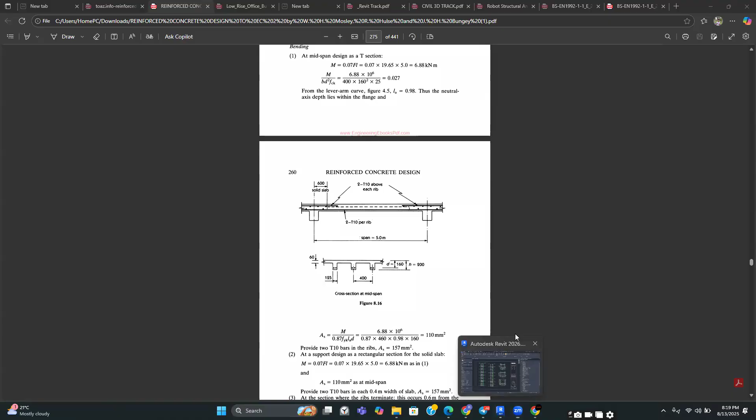So with that, we are going to proceed to the software, and we are going to start with modeling rebars for the staircase. I'm going to share my screen, and once you can see my screen, please type a one so that I can know we are together. Let me know that we are together. Okay super, thank you so much.

So I'm going to go to modeling the rebar for the staircase. At this point, we have modeled rebars for most of the elements, and all that is remaining is the staircase and the slab. So for today, we're going to start with the staircase. To model rebar for the staircase, we need to work in sections, just as we did earlier, just as we have done for all the other elements. For you to model any reinforcement in Revit, I hope by now you can at least appreciate that you have to do it in a section. I will delete these sections that had already been created so that we can create new ones from scratch.

To model rebar for the staircase, the first thing you have to do is go to one of the structural plans. You can open any of them. I'm going to open the first floor. And then once I open the first floor, I will have to create a section view.

And then this is a tricky bit for stairs. You have to work with two sections. The first section will allow you to model rebar for the first run of the staircase, and the second one will allow you to model rebar for the other run, including the landing. But don't worry about that, you are going to see it in action.

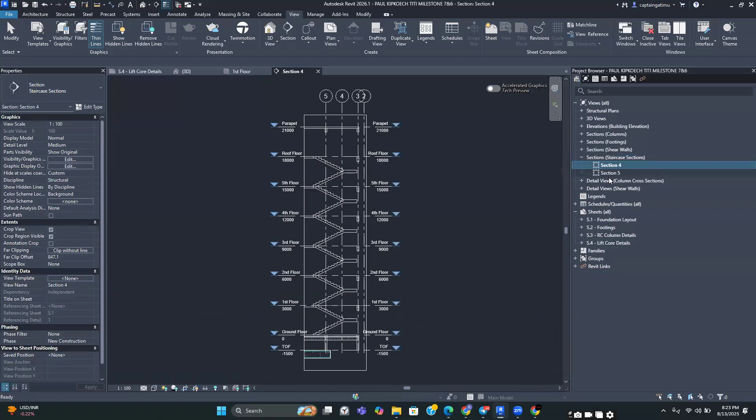After you do that, you can now go to your section views. Let's look for the section views - here they are. You can open both of them, so open both and we'll proceed.

After you have opened these section views, you can change the scale. You can work with 1:50 or 1:75, depending on how much detail you need in your papers. If you want to fit more details into your paper space, then you can work with a smaller scale, the 1:75. But if you're going to have a dedicated page for the staircase, you can use the 1:50 because it's going to allow you to have a bigger representation for your staircase details.

After this, you're going to follow the same procedure we have done over and over again. We are going to clean this up a bit, selecting the grids that we do not need in the views and hiding them. We're going to hide all the elements that we do not need, and we can also extend this forward just a little. Then after that, we can hide this in view, ensuring it's very clean, and then you are good to go.

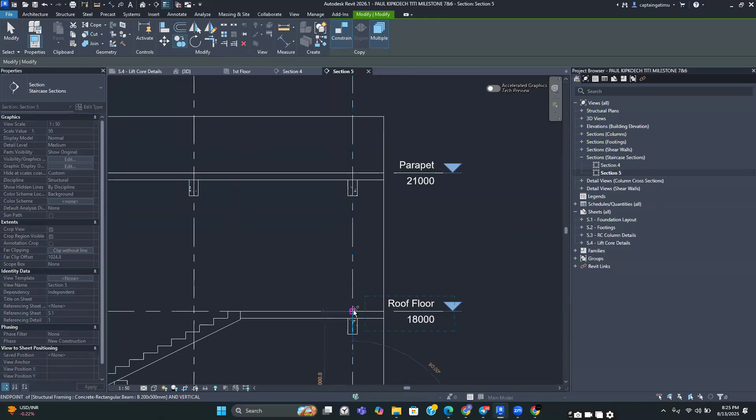Go to the annotate tab, use the components, and now place the breakline so that you can have your breakline there. Then select the breakline and copy it to the other floors - copy it upwards, choose a base point that you can easily track or find in the other floors, and place it. Okay, and then you have your breakline there.

Let's copy it as well from this floor to this floor as well. Then from here, we can extend it so that it goes below the ground floor. I'll select it, type CS to create similar, and create another one there just to break my columns. Then I can bring this one up a little bit and fit it much better. After I have that, I can just copy this to the other columns - that's what you're going to do. After you've done that, you're going to have a very, very clean detail.

So we are going to start with one thing. The first thing that you're going to do is to create the staircase thickener, and this thickener is what is going to be the foundation for our stairs.

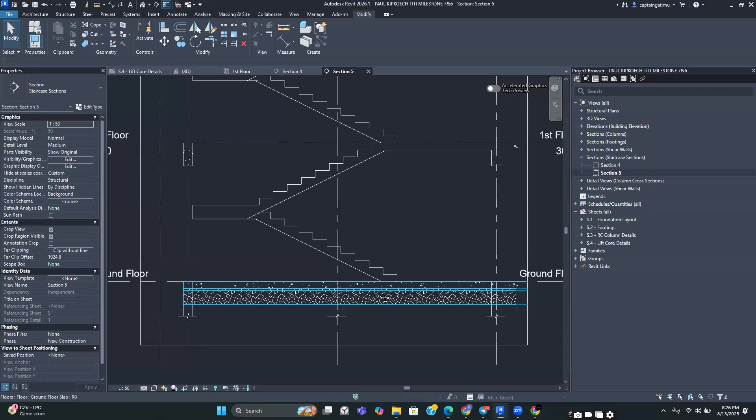I remember in one of the sessions, someone asked how we model or show the staircase foundation in the ground floor. Okay, so this is how you do it. We create a staircase thickener in Revit, and it's relatively easy. You go to the View tab and use the cut profile to create the staircase thickener, or what you'd call the staircase foundation. That is the foundation that is going to be restraining or supporting this slab from this point here. Before I create it, let me reiterate the process we're going to follow to model rebar for the staircase. First, go to a structural plan.

You're going to create two section views, and ensure these section views show you both runs of the staircase. This one should be placed along this run, and it should show you this run as well. Then this one, you should place along this run, and you should extend the view depth so that you can view this other run as well.

If I was to select one of these views and reduce the view depth so it does not go into the other run, this is how the detail would look like. In the section view, you will not be able to see the other run. But as you extend it, remember, the deeper or the more objects in your view depth, the more you're going to see in your section. After you extend it, you're now able to see it in the other section as well. So with that, I think we can proceed to model the thickener.

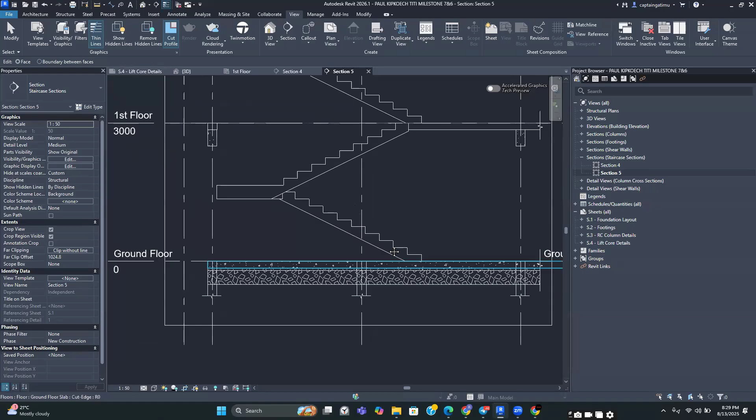If you click on cut profile, come to your section, and try to select this lower run of the staircase, you're going to find that I cannot select it in this section 5. But if I go to section 4, I should be able to select it. I hope you saw that.

If you go to section 5, I'm only allowed to interact with the top part of this run of this staircase. So if I try to create the thickener using this view, I will not be able to. If I click on this run of the staircase, the software will not allow me to select it. If you find yourself in a similar situation, just go to the other run and clean this run up, then clean up this section. If you try to do something in one section and the software does not let you, just click escape, get out of that command, and go to the other section.

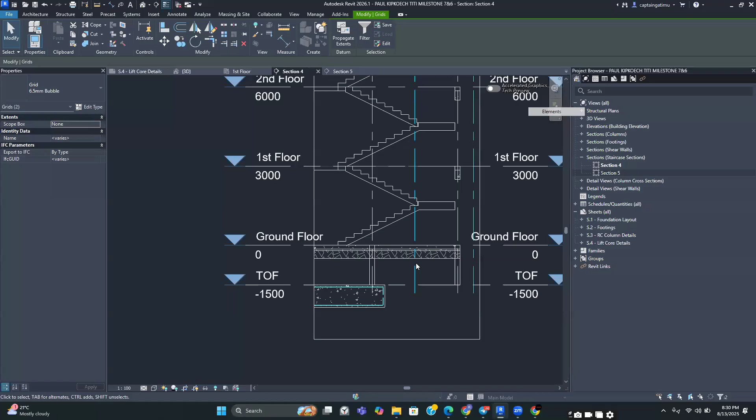This is the section that you're going to be creating the cut profile in. If you go to the cut profile and select the lower run of the staircase, and it is highlighted in such a manner, this is the section we are interested in, and the one we have to clean up. I'll clean my sections again, hiding the unnecessary items in this section, and then extend it a little bit. Then I'll go to annotate components and redo basically everything that we had done in the other view. Let me start with these columns here.

Let me have something of that sort and bring it up just a little bit. I'll select this and copy it from that grid to the other columns as well. Then with that, I can now bring this one up to that section.

Then I'll change the scale to 1:50, and select one of these break lines, type CS to select create similar, and place another section or break line at that point, then extend it to that point. Then I'll select this, create similar, type CS, and place another one at that junction.

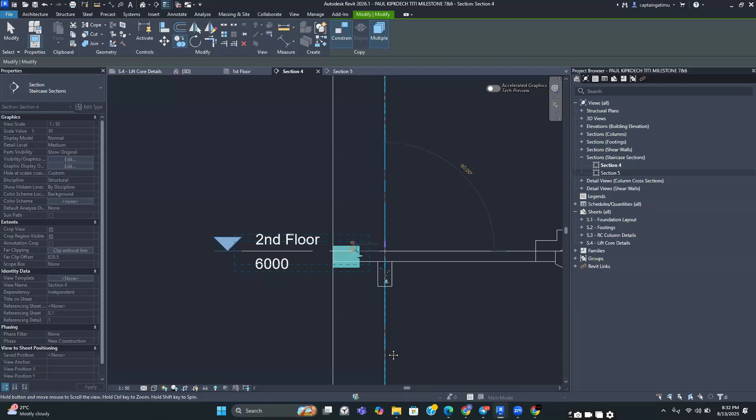Then I can minimize this one so that it fits better into this slab, because this slab is a bit thinner, or has a lesser depth than the ground floor. So after that, I'll select this and copy it to the other floors.

So that's how we do it. After you do that, please ensure you hide everything that you do not need, like those section views — they are unnecessary at this point. So select them and hide them.

After you have such a clean detail, we want to start creating the staircase foundation, or what is referred to as a staircase thickener. So we go to structure, or view, and create that cut profile. Basically, how the staircase foundation or thickener happens is — remember that this slab is only 150 millimeters deep.

And then we have the dust blinding, and the compacted murram. These materials are not strong enough to provide the staircase with any kind of restraint or support. So the thickener shows the guys on site that at this point, this foundation, or staircase thickener, will not be formed of these materials — the compacted murram as well as the dust blinding. It's going to be concreted with the ground floor slab. So that's the purpose of having that thickener.

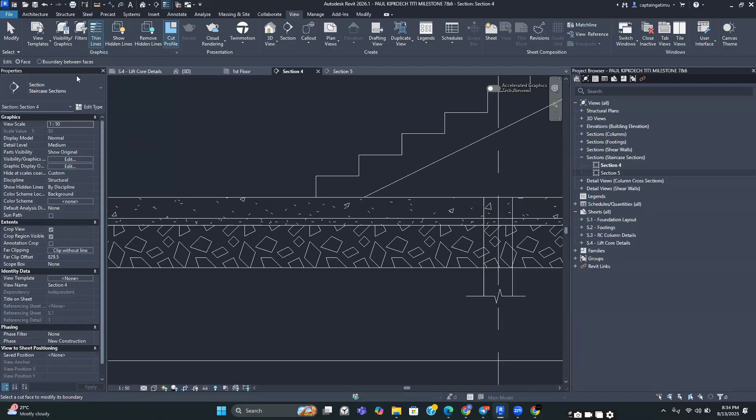For this one, we use by face when there is no other material between those two faces. For example, this one you're going to use face because there's no other material here. For the slab layers, we use boundary between faces because there are multiple faces — we have this face, then the layer for the dust blinding, and then the face for the murram.

So as we said, we start with cut profile, ensure that in edit you have selected face, then select the lower run of your staircase. After that, draw a line and extend your cursor downwards at the end of the second tread. Extend it downwards, and once you get to the boundary of this lower edge of the staircase, left click, drag it downwards, and drag it to this other edge where this lower surface of the staircase meets the ground floor.

At this point, you have to note that you should not close this boundary — you have to leave one of the edges open. I repeat, you should not close this boundary; you need to leave one of the faces open. So this is the face that you are going to be leaving open.

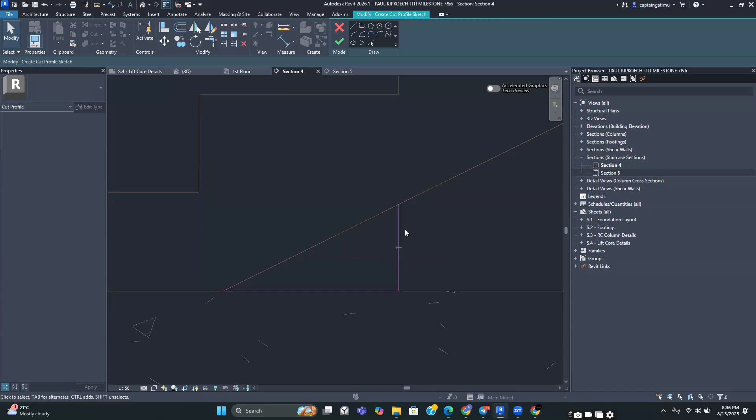This arrow shows you the material that is going to be used to create the thickener. Since we want the staircase material, the concrete, to be used to create the thickener, this arrow should point inwards. If your arrow points inwards, just click finish. But if it points outward, click on it and it will face the other way, then click finish. Now you have the first part of your thickener, so we'll proceed to create the others.

To create the rest of the thickener, we go to view, and use the cut profile again. Left click on cut profile, and for now we are going to use boundary between faces.

So I will left click on boundary between faces, and then I'm going to be prompted to select the face I want. We are now interested in creating the thickener downwards here, between the layers, between the slab layers. And that's why we use the cut profile boundary between faces.

So you go to cut profile, click on boundary between faces, zoom in and select this boundary between the concrete and the dust blinding. You select it, and then the contextual ribbon is going to change to allow you to model. Before you model, we're just going to draw a few lines so that they can guide us.

So I'm going to use the pick lines, and then enter an offset of 150 mm. I'll offset this by 150 on this edge, and this by 150. Then I'll press escape, select this edge that I just drew, extend it downwards, select this one, and extend it downwards. After that, now I can model my cut profile.

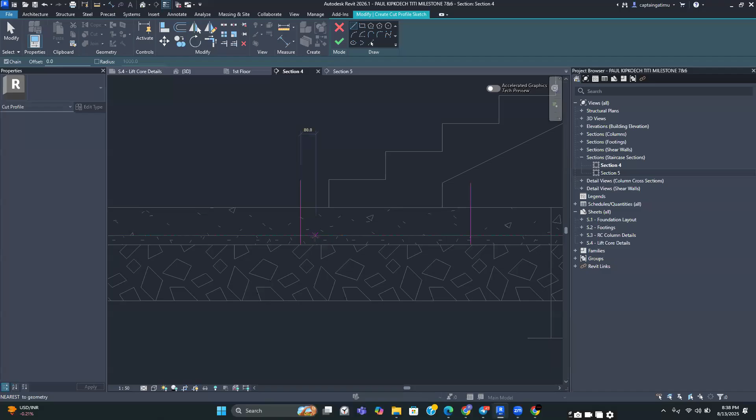So I'll select line, come to the intersection between this line and this boundary, and draw an inclined line at 45 degrees. Then I'll do the same on this other end - I'll draw a line, and at this point it will be 135 degrees.

And then I will extend it to meet this line here. After that, I'll delete these other lines - they are not necessary. Remember one face has to be open, so this is the face you're going to leave open, and you click on finish. You can see now that some profile has been made here.

You can see now the concrete is going into this level at this point, and then at this point it goes back into the layers as they were. All right, so we have that there. So the next one is to create the boundary between this material here and this material here.

So to do that, we go to cut profile, and then select boundary between faces. At this point, you're going to select this boundary, and after you select this boundary, it's going to go down by a depth of 150 mm. So you click on pick lines, enter 150 in the offset, and press enter.

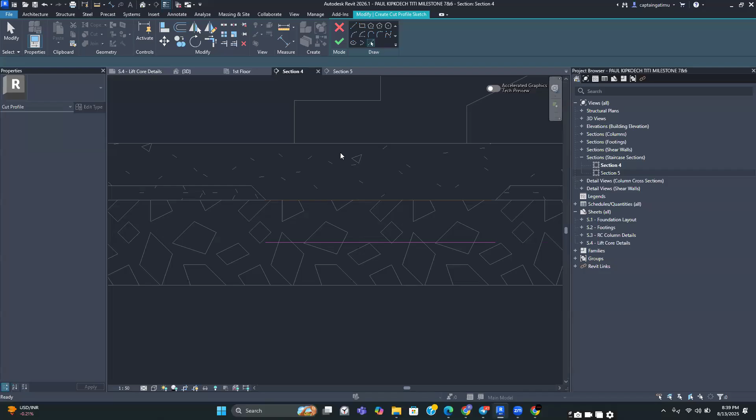And then after that, you just create your offset going downwards, and use the line tool to guide this one to go downwards. Extend it by 45 degrees and do the same on this other edge, just 135 degrees. After they join, use the trim extend to corner to trim them. Then you can click on finish and you're good to go.

And then by doing that, you've now created a detail for your staircase thickener.

So after you have done that, now you can start modeling your rebars. It's going to follow the same procedure that we did for the other elements. The first thing that you are always going to do is to model the concrete cover. So you're going to start with the concrete cover.

You're going to go to structure, and then left click on cover and select our staircase. After you select your staircase, we are going to create a new cover here - a new cover setting for the slabs and staircase. So I'm going to click on add and add slabs and stairs. In the setting, I'm going to use a setting of 25 and then click OK.

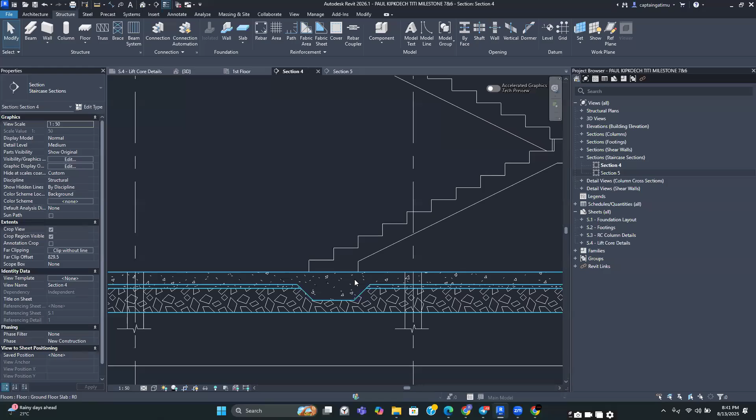So now to model the other bars, to model the staircase bars, we are going to start with the starter bars. And the starter bars are the bars that go into the thickener, and they are going to be restraining our staircase from this point here.

After that, we are going to model the bottom bars and the top bars as well for the staircase. And remember, as we said, Revit only allows us to interact with one run at a time. So in this section, we can only interact with the lower run, and in the second section, we can only interact with the upper run.

Okay, so you're going to go to section, left click on rebar, and then we are going to draw them by sketch. So click on sketch, and then as usual, you're going to select your staircase. To use the sketch option, you go to rebar, left click on sketch, and select your staircase. After that, you can now model your rebar.

Before we model our rebar, let's go to the properties. Ensure that you are using a diameter of T12 for the starter bars. And then for the partition, let's create a new one. Let's call it stairs. And then in the rebar set, we cannot change that at this point.

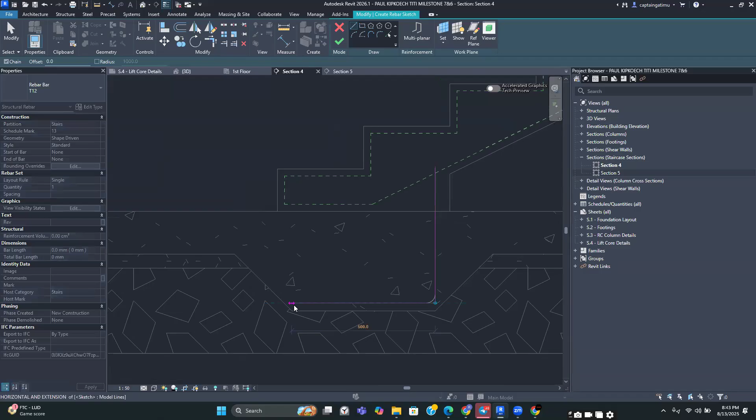So we are going to draw it first. We are going to draw the layout of our rebar, extend it to that point there. And then for this point, extend it to this point here and bring it upwards. And then at this point, this is going to be used to restrain our slab, our staircase, in that order. So you extend it to that point there and use the trim extend to corner to join them. If this happens, just redo that. And you have the outline for your starter bars.

Then after you have that, click on finish and you have one starter bar. Then select the starter bar, go to its properties, change the layout rule from single to maximum spacing and have a spacing of 200 mm.

And then in the comments, now enter the new comment. We've not used this comment before, so it's going to be starter bars. And then you can click on apply and you are good to go. So that is the first step.

Then the second step will now be to model the bottom one bars. We are going to start with modeling the bottom one bars. But before I model the bottom one bars, I'd like to bring something to your attention.

So the bottom bar of the staircase usually goes into the top part of the landing as well as into the slab. So the bar running along the bottom part of the staircase is going to go into the top part of the slab. The reason for that is if it goes to the top, it has a larger concrete depth to anchor it or provide the restraint it needs. So you can imagine if this bottom bar, the main bar along the longitudinal direction of this staircase, goes into the bottom part of the landing...

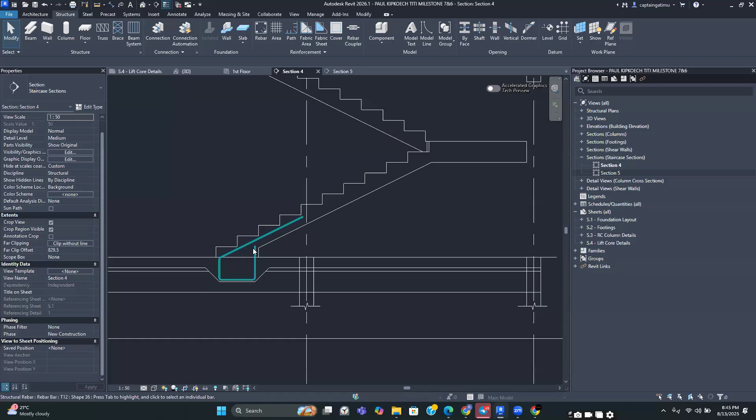So we are going to start with the bottom bar. We are going to select rebar, and then we are going to go to sketch. And then after you go to sketch, we are going to select the staircase.

At this point, I hope you can see what I was saying earlier. Revit allows you to only interact with the lower run. So in this run, you can see only the lower run of the staircase has been highlighted through the entire structure. Okay, I hope you can note that.

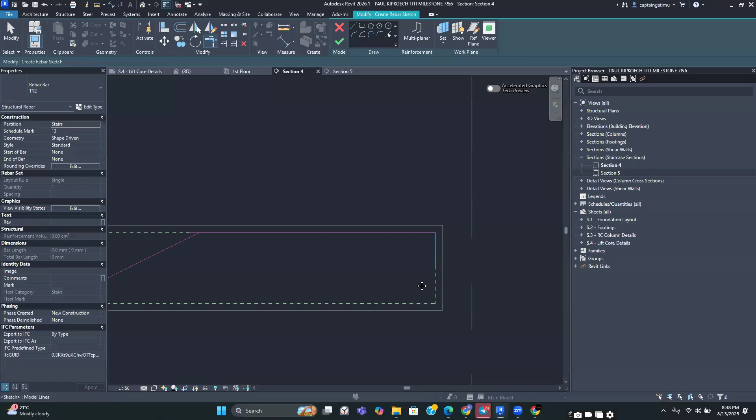Okay, so sometimes this happens. Just select this line and join this, then use trim extend to corner in the different direction, and then click on finish.

After you have that, you can select this rebar, and if you want to change the bar diameter, you can do it from here. After you've selected the rebar, ensure the partition is correct.

Stairs in the layout rule, click on this drop down and change it to maximum spacing. For the spacing, let's have 200 mm. In the comments, we are going to have it as bottom 1, and click on apply. Okay, so we have that.

Then the second thing we need to do now is model the top bar for this portion. To do that, we go to rebar, use the sketch, click on sketch, and select your stairs.

If you are not sure about the length of the bar you should draw as your top bar, this length should be at least a third of your staircase span. So if you're not sure, measure to know the length of this run, and have your top bar running along that direction. In the landing, it should go the same distance.

So if you find that in this run you need about 1.2 meters, go in this way. For example, if you need about 1.2 meters or 1200 mm going that way, you have to ensure that in this run as well it's at least the same.

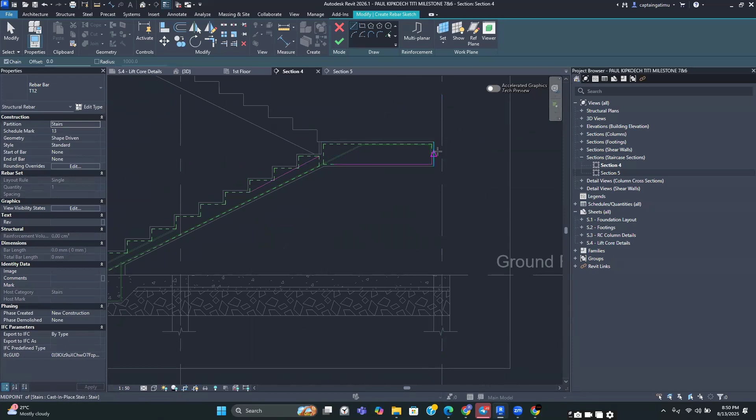But for now, we just extend it to the end of this landing. After you have that, click on trim extend to corner and join them. Okay, so that did not go how I wanted.

I'll just draw another line here, and extend this here. Yeah, and then I'll join them there. That's happening a lot today. Okay, so I have that, and I'll click on finish.

With that, I can select this bar, go to the properties, ensure the partition is correct. In the layout rule, ensure it's maximum spacing, let's have a spacing of 200 mm, and in the comments let's use top one for this one. Then we can click on OK.

Then the next bit is to model the secondary bars, the bottom twos and the top twos. To model those bars, we go to Rebar, use expand to host, and we use shape 00 or 01.

For any bars that we said would be viewed as dots, or running perpendicular to the cover, we select perpendicular to cover, change the layout rule to maximum spacing, and have a spacing of 200 mm. Then partition them correctly as the stairs, and in the comments do the necessary.

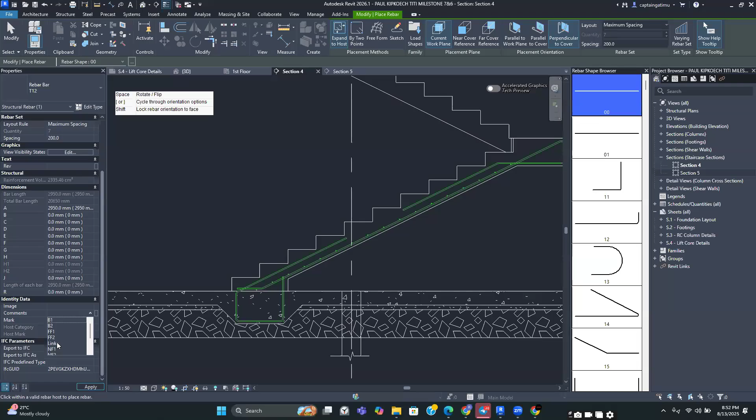In the layout rule, set maximum spacing, and that's the spacing we need. Bring them close near your bar and place them. For this one, we do not need them near this part where we do not have any top bar, so we're going to select it and drag it backwards.

We can have such a detail there, and those will be our top two bars for this particular section here. For this other section over here, we do the same.

We go to Rebar, select shape 00, and place them at this junction there, and we should be good to go. After you do that, select them and drag them so that they span along where they are actually needed. Then, with the bar still selected, change the comments to top two, and you are good to go. That's how you do it.

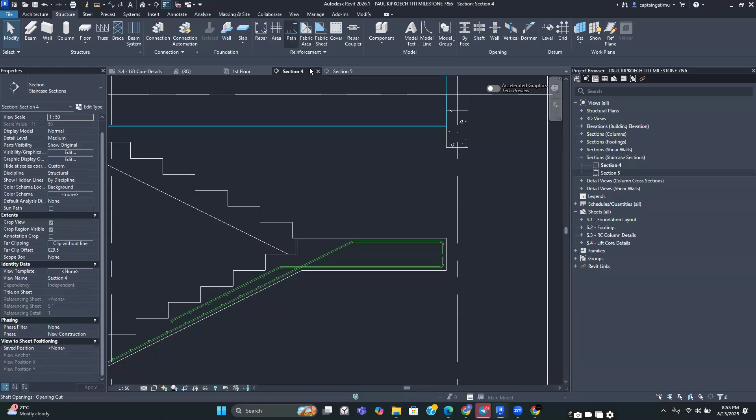The next thing would be to model the bars that are going to be in the landing. For that one, it's going to be easy. You just go to Rebar, click on sketch, and select your staircase.

At this point, we are going to have a bar here. This one can be straight, so we're going to select a bar here and bring it to that section there, and have it there as well. Then click on finish.

For that one, select it, go to the properties, ensure the partition is correct. In the layout rule, have maximum spacing and set it to 200. Then in the comments, let's have this as top one, and we'll be good to go.

I'll model the rest of the bars after I model the bars for the other run, so that it makes a bit more sense.

Now we want to model bars for this top run. It's going to follow the same procedure, but now it needs to go into this other section. If I try to select Rebar, sketch, and select my staircase, I will not be able to draw these bars in this run here. So to model bars in this run, you just go to the other section, select Rebar, select sketch, select your staircase, and then start modeling.

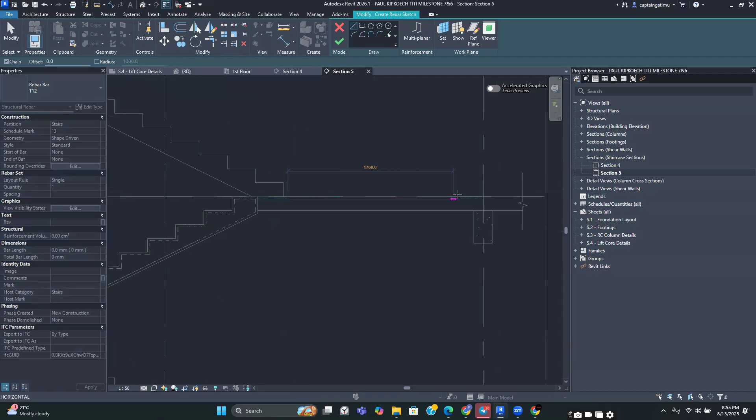For this one, we are going to start from here. Select this bar and model the bottom part of it, and it's going to go along the bottom part of this staircase. Remember, the bottom part of the bottom rebar has to go to the top of the slab, and in the slab, ensure it extends up to the support, then you can curtail it there.

After you have that, use trim extend to corner to join them, or make your work easier in joining them. Then just click on finish, and you should be good to go.

You can now select this bar, go to the properties tab, ensure that it has been partitioned correctly as stairs, and in the layout rule, have maximum spacing with 200 mm. Then in the comments, change the comments to bottom one and click on apply. Then you have your bottom one bar over there.

You're going to select rebar again, use sketch, and sketch the other rebar, so you're going to have a small top bar here. Select to draw just a small top bar there. This top bar will also extend into this lower run as well. You're going to join them in such a manner, and then click on finish.

After you have that, go to the properties tab, select it, change the partition to stairs, the layout rule to maximum spacing, and a spacing of 200 mm. Then in the comments, change the comments to top one for this, and then click outside, and you're good to go.

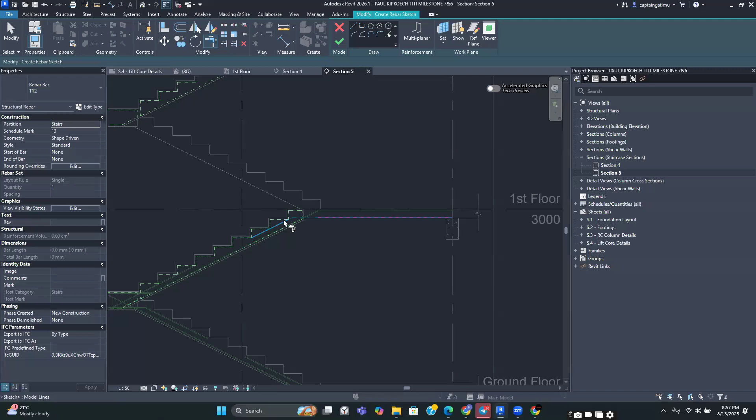After you have that, go to rebar and model the bottom bars, the bottom two bars of the secondary bars. Select shape 00 or 01, go into the properties tab, ensure the diameter is correct, the layout rule is correct, and then set the comments to bottom two, and model or place them there.

For the top two bars, do the same thing: rebar, shape 00, then properties tab, stairs, layout rule maximum spacing, and for the comments set top two. Then zoom in - sometimes it's a bit tricky, so you can just place them at a point and drag them backwards.

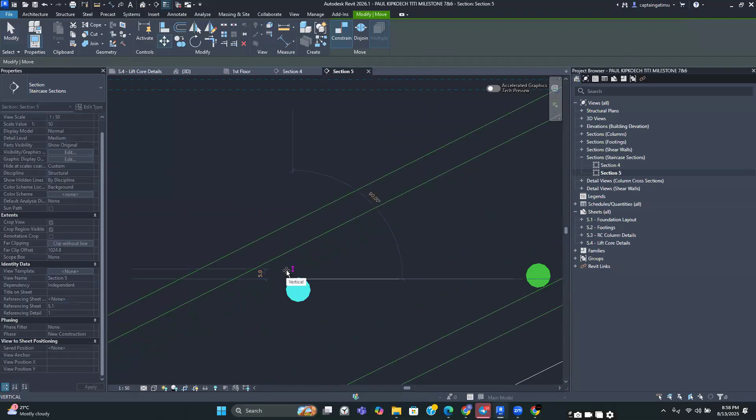You can press shift so that you can move them with the same angle there. Okay, yeah, I think that's good.

After you have that, select them and now drag them to this portion here. Now you have modeled all your bars, at least for the first run.

After you've modeled your bars for the first run, close this one, and we are going to focus on this section that has the thickener. So after you've modeled all the bars for both runs, we are going to focus on this thickener.

If certain bars are not visible, just go to the first floor, select these views, and extend them, just to ensure that both bars, or all the bars, are visible. Once they appear, you are good to go.

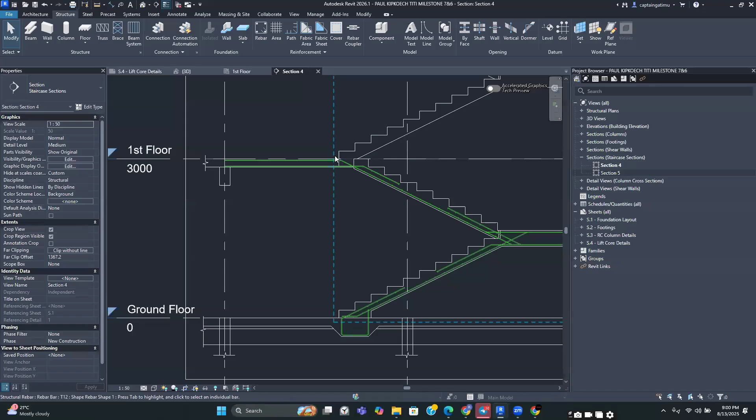At this point, we are going to copy these bars to the other floors instead of remodeling them. We select one of them, right click, and select all rebar in host, so we select all the bars in this staircase. Left click on one, right click, then select all rebar in host.

After you've done that, it becomes easier to copy. Once they're highlighted, click on copy and check constrain, so that you are able to move along the Z axis. Then click on this top part of the grid and copy them vertically upwards to this other top part of the grid where it meets the slab.

After you have that, you're good to go. The only edit you need to make at this point is to select this and delete the starter bars, because we do not need them in this particular view. Please ensure you are muted.

For this one, we could just select it and move it upwards so that we observe the correct cover. Okay, so we have that.

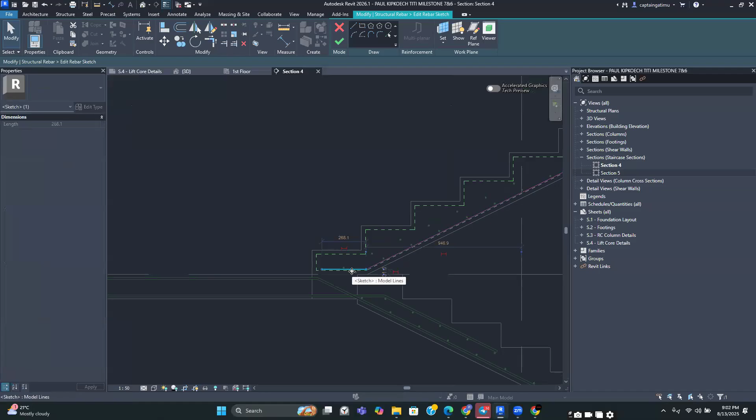The next thing we're going to do is select this bar and edit its shape. We select it, go to edit sketch, and delete this line here, and draw another line here. I'll continue sketching and extend it in such a manner. After I do that, I click on finish and I'll be good to go.

The next one should be this run here. I'm going to go to structure, rebar, and then sketch, and select this other run. Then I'm going to draw the top one bar there and drag it into this section as well.

And then I'll select them, join them, and click on finish. Select this bar - this one does not have the comments, so we have the comments as the top one. For this one, ensure the comments are top one, and for this one, ensure the comments are bottom one as well. Then we can now copy these other bars to the other floors.

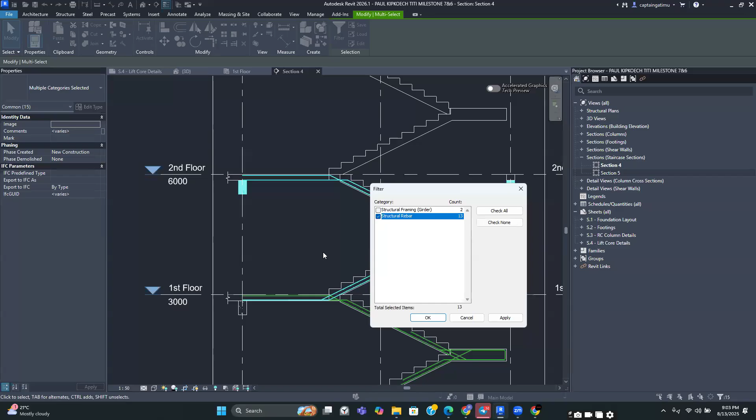So we're going to try and make this easy by highlighting everything here. I'm going to highlight from left to right, highlighting everything in this section to ensure I select everything. Then I'll go to filter, check none, and select structural rebar. Click apply and okay. Then come here and have a look - ensure you do not copy the bars that are going into the lower run. All the bars you've selected are going to be going into the upper run.

If, for instance, you've selected a bar that is going to the lower run - say this one and this one - if you find they have been highlighted, zoom in, press shift, and left click on them. Then go to the other one, press shift and left click on it. After you're satisfied all these bars are going to the upper level...

...you select copy, and we are going to use this top edge of the slab, where this top edge of the slab meets with this grid, as our base point. So we left click on it and copy it to the other floors. You copy it from that floor to the next one - ensure you just click on that similar point on the next structure, then to the next one, and then to the next one.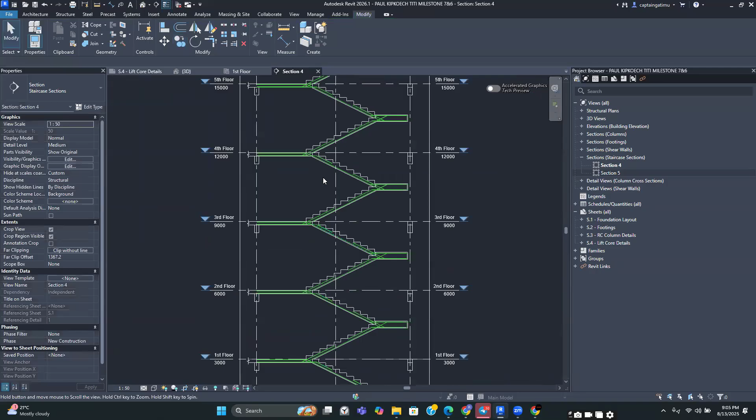After you have that, we'll now have modeled all the rebars for your staircase. All right, so it's that easy to do.

For the annotation, it now becomes even easier for you since you're quite adept with them. You just go to annotate, and for all the sections we've been using tag by category. So you select tag by category, place one, then select it and select the quantity type spacing you've been using, and now you can tag them. Select this one and go to edit type - if it doesn't have an arrow, provide one if you'd like, then click apply and okay, and you'll have your arrow there.

And then you can proceed to tag all of the bars that you have modeled. So it's that easy to do. I will require you to tag the entire section - you're going to tag from the bottom to the top, and then you can have that in your detail.

At this point, you just click on the bar and tag it. For this top one bar, don't have it here - it's going to create a bit of confusion. So for this top bar that is going into the landing, please tag it from this view over here so that it makes sense, so that whoever sees it can understand what is happening. Then continue to tag the others.

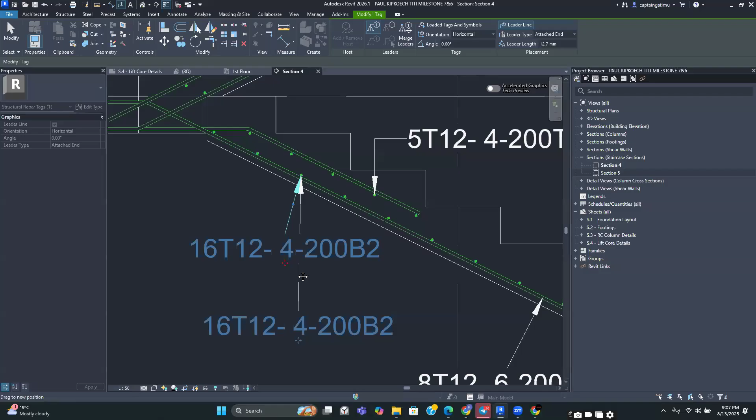Basically that's how you do it - that's how easy it is. And then you can have your details really well. Ensure you arrange these tags in a really orderly manner so that all your details can be easily seen, or read easily.

After you've done this, the next detail you would need to show is the staircase plan detail - you've probably seen detailings that show staircase rebars detailed in plan view. To do that in Revit is easy - just as you did for the footings, go to the structural plan. For this one, I'll recommend you work in the first floor, because you'll be able to see the starter bars. If you do it in other floors, you won't be able to view these starter bars in that plan view. So I recommend you go to the plan view.

At this point, go to View, click on Callouts, and create a callout along this section. After you do that, go to your structural plans and you're going to have the callout here, which you're going to rename. So you can call it stair plan detail, then click outside. After that, left click on it twice.

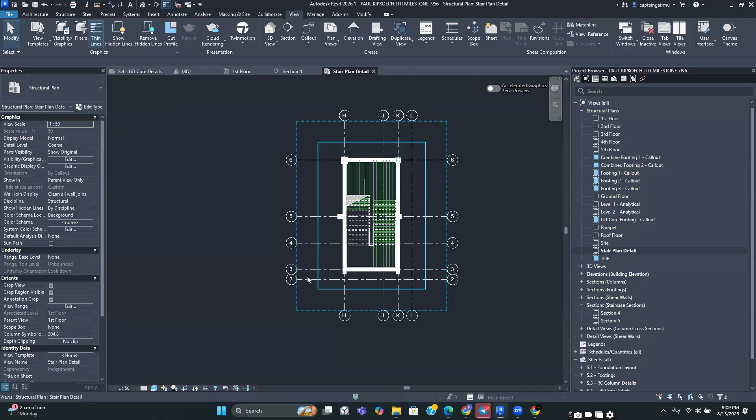And then for all the grids that you do not need, just select them and hide them in view, and then you'll have such a detail.

At this point you'll notice you cannot see all the bars, because this view usually has some settings. Each view in Revit has a setting that defines the depth up to which you can see. For example, in this first floor, by default Revit assigns certain settings to ensure you cannot see the ground floor or even the foundation level. Imagine how confusing it would be if you're on your first floor and you can see your ground floor elements.

Revit also allows you to change those settings so that if you find yourself wanting to see elements from a lower floor in this upper floor, you can do that. That is what we are going to do in this stair plan. This stair plan is in the first floor, and at this point we want to see the rebars in the ground floor as well.

So the rebars we want to see are these lower rebars, which we cannot see in this plan here. To activate that, we first ensure you've not selected anything. Press escape a couple of times to make sure you are not in any command.

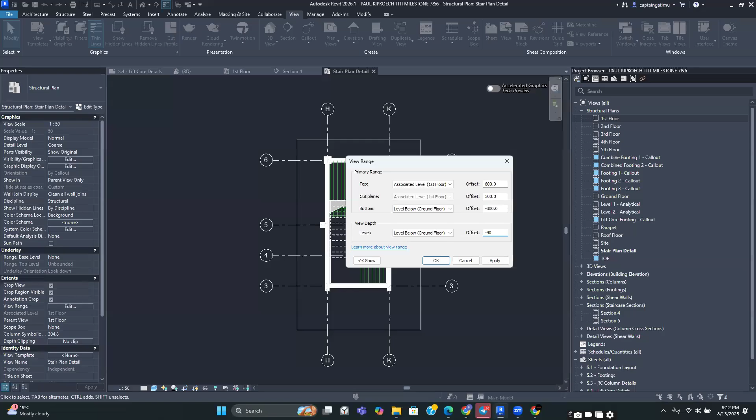The view depth should always be deeper than this level here. You cannot have this one as the first floor and this one as the ground floor - this one should be lower than the bottom. So set the view depth as the ground floor, and for the offset, let it go lower by negative 400 so it's just slightly lower. Then click Apply and OK.

And then you can see that. At this point, we can see the beams from the ground floor, so I'll select them and hide them.

Okay, once you have this, it becomes easier because now all you need to do is change the presentation. You select one set at a time, go to presentation, and alter how they are presented so that you remain with one bar. Then select another one, go to presentation, select none, and select the bar there. Then go to presentation here and click on finish.

Select a bar here, go to presentation, select none, then select one and click there. Select a bar here, go to presentation, select none, select one of them, and click on finish. Do the same here: select one of the bars, go to presentation, select none, and click on finish. Go to this other set, select one, go to presentation, select none, then select one and finish. Then select the other sets, click on presentation, select none, select another one, and click on finish.

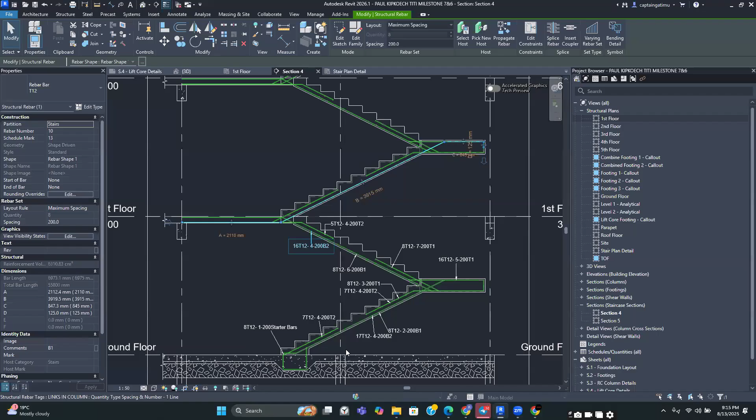So at this point I want to check something before making changes to this one, since this doesn't make sense here. I'll select them and go to the section view to see them. I want to see the bars from this level going downwards. I don't want this bar here since it has already been represented by this other bar. If I have this bar in this view, it means it would be double represented. So for this one, just select this bar, right click, and hide it in view by elements.

Then go to this section. Let's select this bar here, and select these bars - sometimes they are visible, so select them. These are the bars going from the first floor to this landing. Select them in this view, then go to the plan detail, right click, and hide them by elements.

After you've done that, you can select these bars, go to presentation, select none, and select one, then click on finish. With that, you have a good detail. For this one, I can change how it has been represented so I can have a bit of space between those two bars. Now I am good to go.

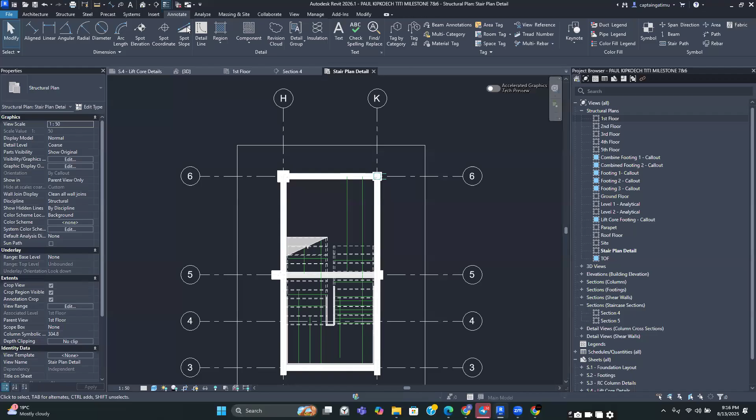After you do this, just annotate them. Click on annotate, multi-rebar tag, and annotate them. So this bar isn't doing that because it's a single bar, so you have to select it, go to layout rule, change the spacing to maximum, enter the spacing, and then check if it has a comment.

If it doesn't have any comments and you're not sure which bar it is, go to the section view - from there you can decide or tell which bar it is. For this one, we can now tell from this view that it's a top bar. Click on apply and go back to your detail view. Then select it, click on presentation, select none, and select the others. Now you can select the multi-rebar tag and place it appropriately, and do the same for this one, placing them there.

For this one as well - this one I haven't changed its presentation, so I select none, then select one of them and click on finish. After that, I can go to multi-rebar tag and tag it. Let me look for a position to place it. Okay, I have that, and then I can place this one, and I will have it there.

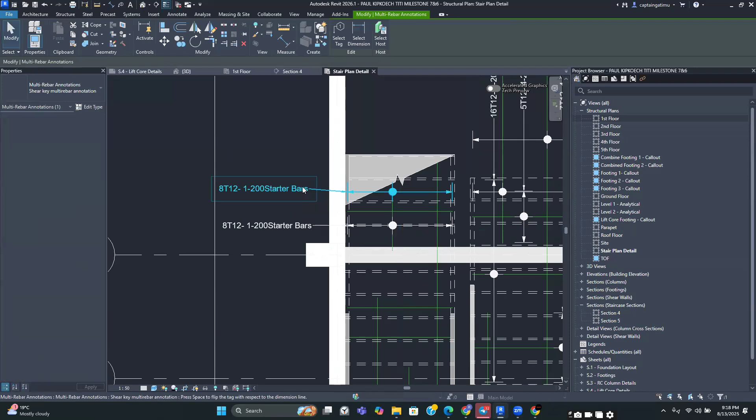So I've created this tag twice, so I'll delete one of them. And for this one, I can place it around here.

And then all now I need to do is tag these ones and I'll be good to go. So basically that's how you can easily create this detail. If you've used CAD, I know this could be a bit of a task, but with Revit at least it's a bit easier because all you need to do is create a view, get to see how your bars have been represented, and then annotate them.

And then for the grids, as usual, I always try and bring them closer to the model so that they do not occupy a lot of space when we go to the paper space. Select them, select these ones, and then bring them closer. For this one, bring them closer, but ensure that they do not go beyond the tags. Do that as well, and bring this close. And then you can click outside. And then with that, I think you should be good to go. Okay, so that's how you annotate a staircase plan detail.

All right, so that's how you do the detailing, or you model the rebars for the staircase. And then the other thing that I'd like to show you is something that we have done before. So the staircase that we have actually annotated, let me select it here.

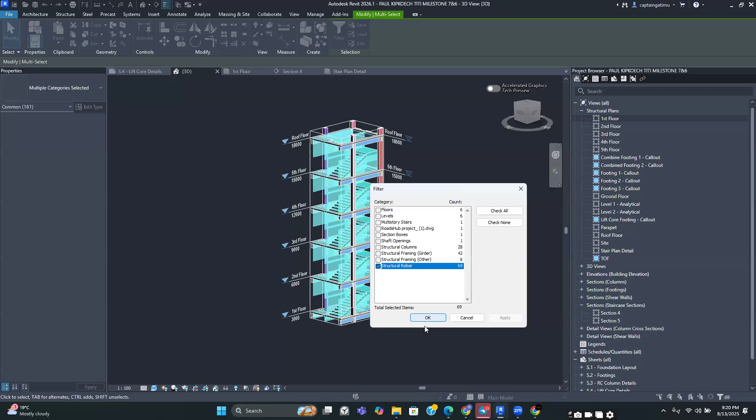Okay, I will go to the view tab here. And then I'll highlight everything. I'll go to filter, check none, then I'll check structural rebar only, click on apply. And then in the visibility graphics, I can have this as view unobscured.

And then you can be able to see how your rebars are arranged even before you go to site. So if there is something that is clashing with anything else, you can be able to tell that early enough. And then you can even hide the staircase in this view, and it'll be good to go. Okay, so that's how we generally model those rebars here.

Okay, so I'll go to the next part. And the next part now we're going to be modeling the hollow pot slab. You're going to do it in two steps. First, you're going to create the ribs inside Revit, and then we are going to use the family creation tools to create the hollow pot slabs.

Okay, so I want you to take a look at the image we sent in the channel. So this is the type of hollow pot that we want to create, and they are usually used to fill the space between the ribs. So as you design your slabs, or as you design any RC member, you know that below the neutral axis, we do not need any concrete there for compression, right? So if we do not need the concrete for compression, the idea is we can replace it with cheaper and lighter materials to make our design more efficient.

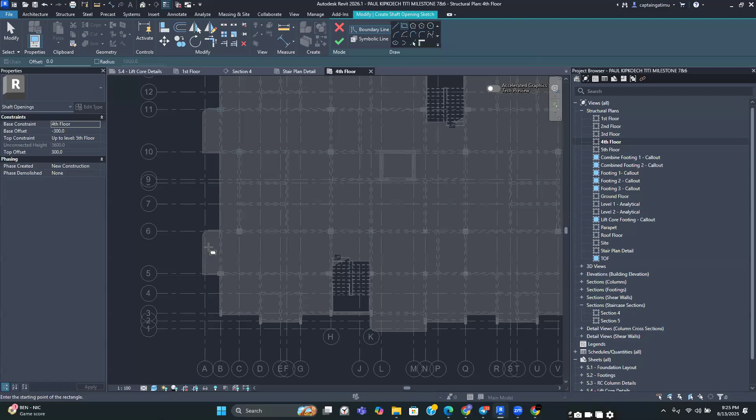To do that, we are going to go to Structure, and then go to Shafts, to create a shaft opening. Click on Opening over the rectangle, and you can draw a rectangle to create the shaft opening, then click on Finish.

That is one way you can do it. Alternatively, the other way to create this opening is by selecting the slab itself and going to Edit Boundary. Then you can select the areas where you do not want the concrete to be. For these large spans, you're going to use the pick lines to pick the inner edges of the beam.

And then use the trim extend to corner to join them, and click on Finish. That's another way you can create an opening or space in your slab for the other systems. So I'll repeat that.

To do this, you select the slab boundary, go to Edit Boundary, and then for these large spans, select the inner edges of their beams, and use the trim extend to corner to ensure these boundaries are continuous, then click on Finish.

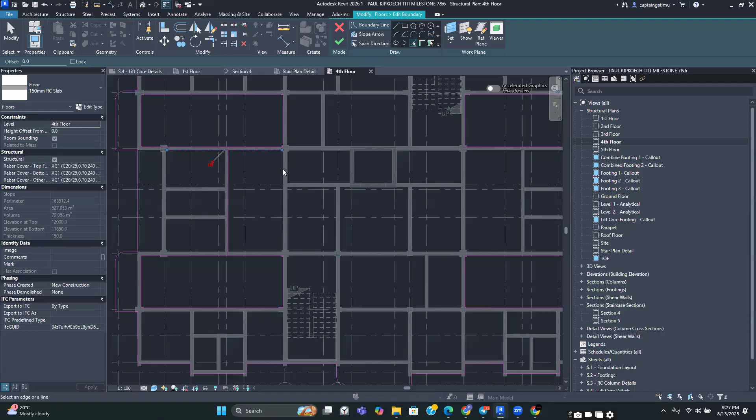We do the same here. We select these, and these, then trim extend to corner. And then this portion here, trim extend to corner. We're going to use the trim extend to corner here to close this loop.

Okay, now we have that. After we have that, we can click on Finish, and just click on Attach, and you're good to go.

If you haven't created an opening for the staircase, you can use any of the methods we know at this point to create that opening. But this region here, where you have your lift core, should have an opening to allow the lift core to go up and down. As it has been modeled this way, this is quite wrong, so you can just correct it.

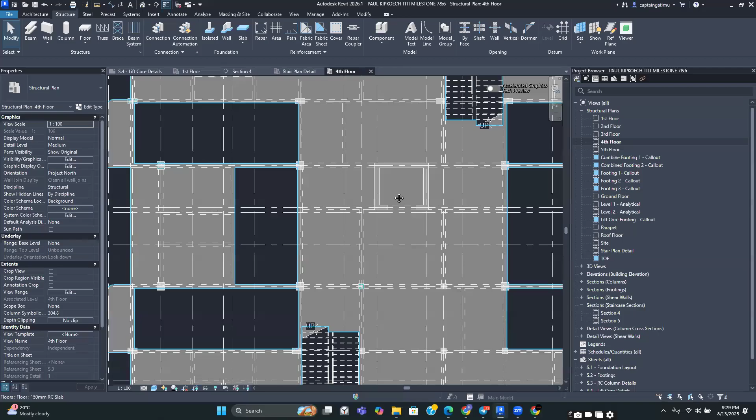After we've modeled these and created the space, now we are going to do the modeling. We are going to start with creating the ribs, and the ribs act as the supports for your hollow pots. So basically this is what you're going to be having: these are the ribs, and the hollow pots are going to fill the space between these two ribs.

Just as you saw in the video, you saw the ribs being placed, and the ribbers were laying in such a manner. We are going to share the video so you can rewatch it and get a better understanding of what you are doing, so you can model this better.

We are now going to start creating these ribs, and we are going to use a new tool called the beam system. We are interested in creating many beams running at a given interval, so we do not need to model them one by one—that would be tedious. We're going to use the beam system to make that much easier for us. But before we do that, I'd like to bring something to your attention here. This is something you should note. Let's see—okay, so this is what we have.

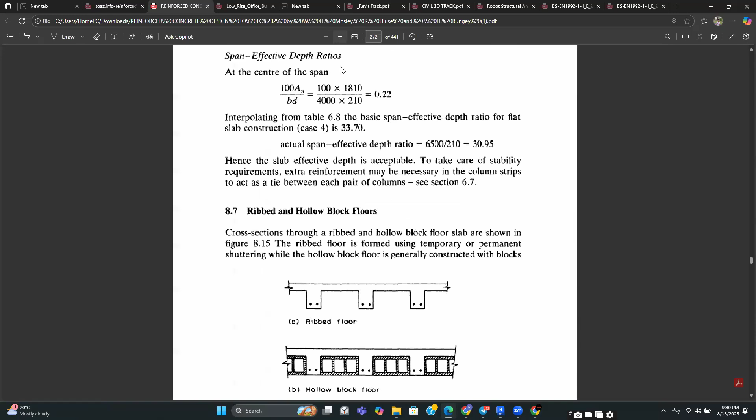So you can see the ribbed and hollow block floors, they behave the same way structurally. The only difference is that in the ribbed floor, you do not have these blocks here to fill the space. The advantage of having this hollow block floor over the ribbed floor is it is easier to get the props that we use during casting for this slab. So for this one to cast would be a bit expensive, but for this one we've used the local materials available. That's one of the advantages of having these blocks over here.

And then they are going to be supported by these beams here, and these beams are going to be placed at a given interval. So this is the thing I wanted to bring to your attention. Let me see if I can highlight this. Okay, so here it is.

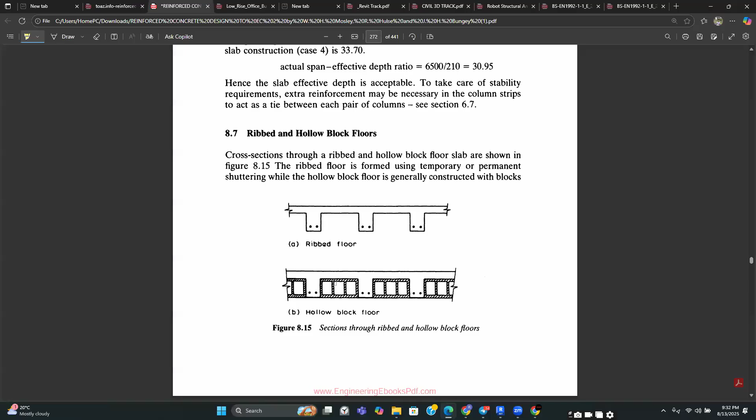So the thickness of the flange should not be less than 40 millimeters or 1/10 of the clear distance between the ribs, whichever is greater. So we are being told that the thickness from the top of this pot to the top of the slab should not be less than 40mm or 1/10 of the clear distance between the ribs. The clear distance is this portion here where the pot will be occupying. So if we have a pot of say 390 millimeters, such as the one we have there, you can see that the minimum distance we could actually have is 40mm because it's greater than 390 divided by 10.

And then for the ribs without the blocks, the depth should be 50 millimeters at least. But I think here in Kenya the practice is usually have this depth at 60 to 75mm, and then you incorporate these ribs depending on your design.

And then the other one is the ribs should be placed no further than 1.5 meters apart, and their depth should not be greater than four times their width. So as you do your design, the spacing between the ribs should not be greater than 1.5 meters.

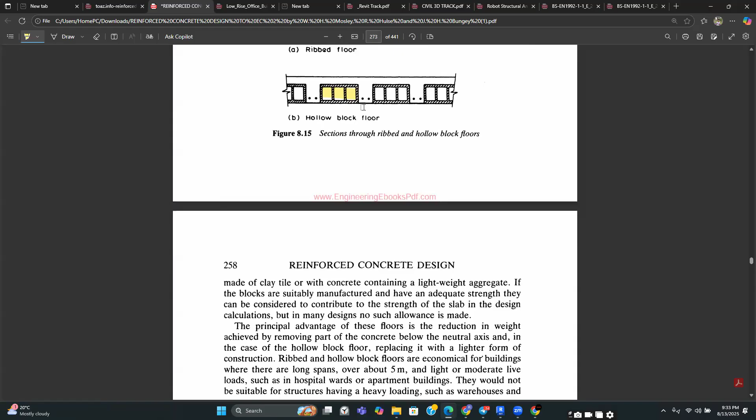And then also the distance from the lower edge of the flange to this point here, or the depth of this ribbing here, should not be... the depth below the flange should not be greater than four times their width. So this distance here below the flange should not be greater than four times the width of this rib here.

All right, I think so. With that in mind, I think we can now go and model our ribs. So we are going to start with these ribs, then we are going to place our hollow block, our pots. To do this, we are going to use the beam system.

So we are going to select the ribs, and then as you select the ribs, you're going to have this section here. So I forgot one thing, we need to create the beam cross section first. So you need to create a beam cross section first. So you're going to go to beam. Your first stop to creating the hollow pot system is to go to the beams.

And then once you go to the beams, you're going to go to edit type, and you're going to create a rib system. So you're going to click on duplicate, and then you're going to create a new family or a new type. So let's call it ribs, and then click on OK.

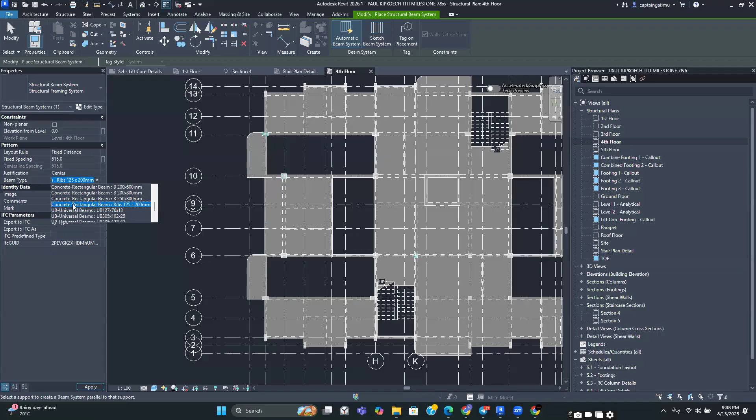And then for the justification, ensure that it is center to center, and in the beam type, this is where you select the cross section we created. So select the cross section, ribs 125 by 200, and you should be good to go.

And then as you model this, you should ensure that the ribs run along the shortest span. The ribs should run along the shortest span. So as you model them, ensure they run along the shortest span.

You can use either the automatic system. If you use the automatic system, all you need to do is place your cursor in this section here, and as you place it, it's going to draw those dotted lines. If you are satisfied with the direction along which they are running, you can place them. For this one, they're running downwards, which is along the short span. So I'm going to left click and place them. Now if I try and measure the distance between these two ribs, you can see I have sufficient space to model or enter my pots.

So I'm going to redemonstrate that. You go to beam system, and then our interest is in the pattern, so we use layout rule, and the layout rule we use is fixed distance. The spacing should be centered, should be 515. How we got this 515 is the thickness or width of that particular hollow pot, and then you add the 125 millimeters. Then you click enter, and after that you go to justification, ensure it is center, and in the beam type ensure that it's the ribs you created.

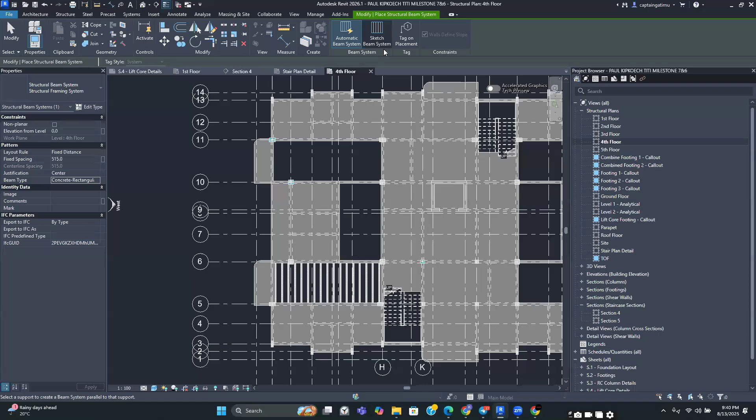And then with that, you can now go and sketch your rib system. You can either use automatic or beam system. So for sketch beam system, you need to sketch the boundary of your beam, of your rib. You can sketch it as you did earlier, sketch the boundary and then use the trim extend to corner.

And then use the trim extend to corner. And if you choose the sketch boundary, you have to enter the beam direction. We said it has to be along, the beams have to lie along the short span. So this direction symbol here shows you the direction. At the moment, Revit is going to model them running this way. To change this, you just go to beam direction, use pick lines, select the short span, and then click on finish.

Okay, so it's not continuous on this end, so I just click on finish, and you do that, and click on finish. So I'll select one of these tags, select all instances visible in view, and delete them. So I'll do that one more time.

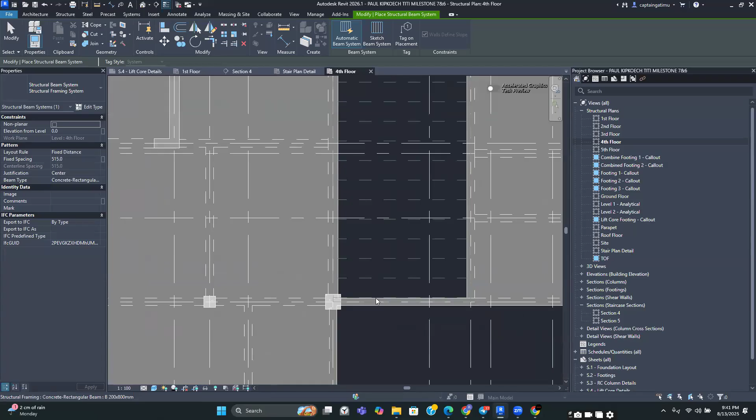For this one, I recommend you use the automatic beam system, it's much faster. For the pattern, it remains the same. You just come to this section here, move around with your cursor, and once it appears, press the space, just move it around the supports and then place it there. And then let's do the final one here. Move along your cursor along the beams and then click there.

Do that there, and that there, and you should be good to go.

Now after you have this, the next part is creating the hollow pot slab itself. Note that Revit does not come with these pods, so you will have to create a new family for yourself.

Creating them is generally easy, only that it will introduce you to a new environment of Revit that we have not done before.

So we are going to go to File, and then once you go to File, we are going to go to New, and then we are going to click on Family.

Once you click on Family, this new family pop-up is going to appear and it's asking you to select a template file.

You're going to click on this dropdown and go to Family Templates, then select English. Once you select English, scroll down and select Metric Generic Model.

Don't be worried about these templates, just as families appear in different folders. Any family you need to create in Revit usually comes with its own template. So whether you create a door, a column, a beam, or a furniture, you're going to have a given template to assist you and make that easy for you.

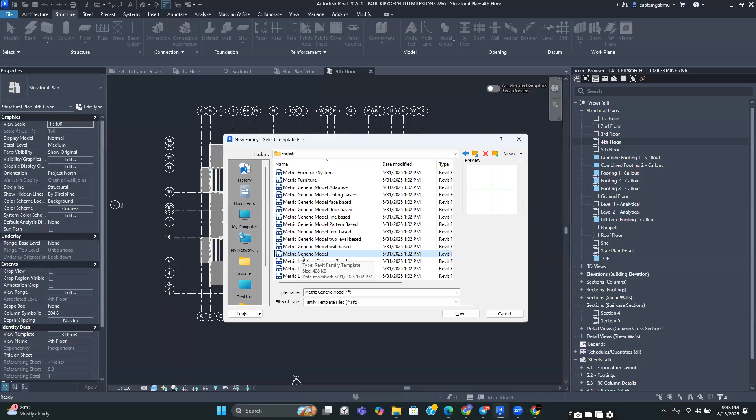So for now, to create the pods, we are going to use the Metric Generic Model. Left click on Metric Generic Model and click Open.

Once you click Open, you're going to go into this environment that we've not been in before. You'll notice the contextual ribbon looks a bit different. It has a few elements, and these are what you're going to be using to model the pod.

At this point, I don't want you to focus on the other elements, only on what you're going to do. Just follow my steps, don't worry about the rest. You'll probably cover them later on or in an advanced course. For now, we are only focusing on creating this one family.

To create this family, you're going to create it by extrusion. By extrusion, we basically create that model, or that 3D element—we just extrude it. So we're going to use extrusion.

The face that we are going to be using is this front face. We are going to use this front face to create our family.

So we're going to go to Revit, and then once you go to Revit, in the project browser on my right—please let me know we are together, type a one if you are together.

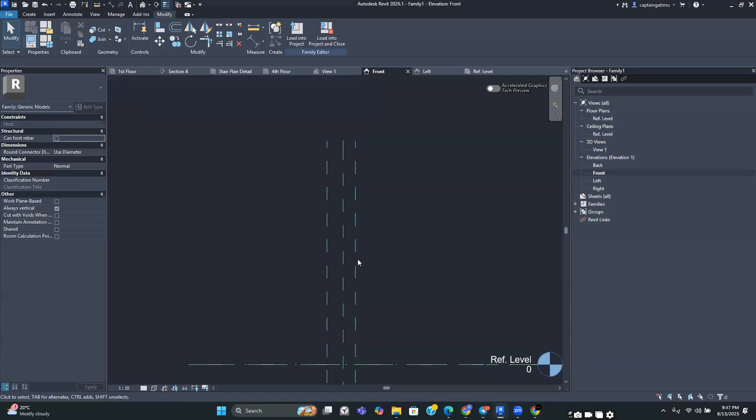Then let's do the other one. So we go to create, remember you are using the reference plane. Click on reference plane, and now draw other lines on the outer sides. After you do that, select the outer line - select the outer line. Select this distance and enter the distance 25, press enter. Then select this outer one, type the distance here, and press enter. Now you have at least the outer edges formed.

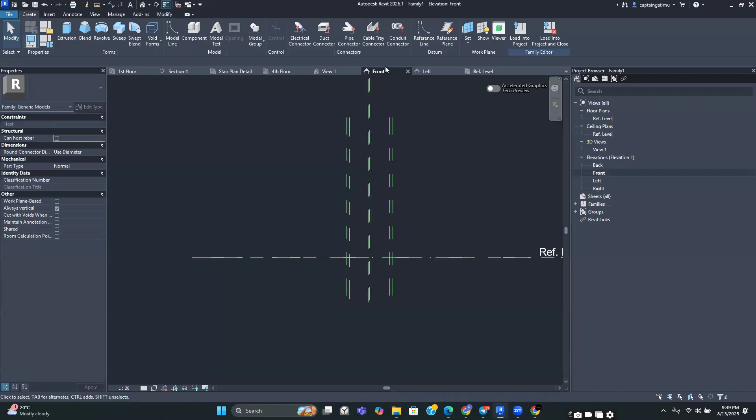So we have these, we have a representation of these. I hope you can all see that. So we have at least a representation of this. What we need to do now is draw the extrusion, and then Revit is going to do it in 3D.

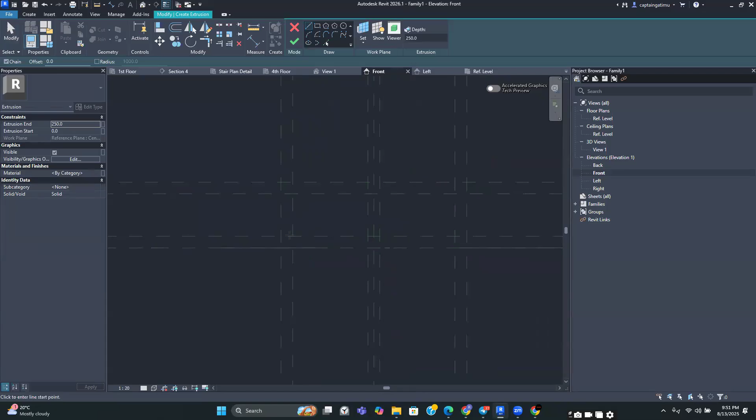So we go to the software, and as we said, we are going to model this by extrusion. We go to create, and left click on extrusion. After you click on extrusion, it behaves the same way as modeling the slabs - all you need to do is draw the boundary. So we start from the outer edge, just draw a line. You can incline it at this point - I think most of the hollow pots I've seen in Kenya usually have this inclination here. So incline it at that point, incline this one there, and model it to the top, to the bottom one here, the bottom one there, and then use trim extend to corner.

Okay, at this point please don't close. If you close at this point, this is what will happen: if you go to 3D, you'll have a solid block. So I had Rashid, you said you use solid concrete blocks, so if you need a solid concrete block, this is how you create it. But for us now, we are interested in having a hollow block. So what you are going to do is go to edit extrusion so that we can create the other boundary, so that the concrete part remains the thickness only. Same principle as you've been using for the slabs, same principle as you've been using for the shafts, it just applies here.

So I'm going to start with the pick lines, and use an offset of 25mm, then offset this particular edge, and offset this edge as well. Then I can offset this one, this one, this one, then change this to 0, and pick this in a line, this in a line, and this one there. Then I'll use trim extend to corner to ensure it is a continuous loop. Remember, it's just the same principle, nothing new.

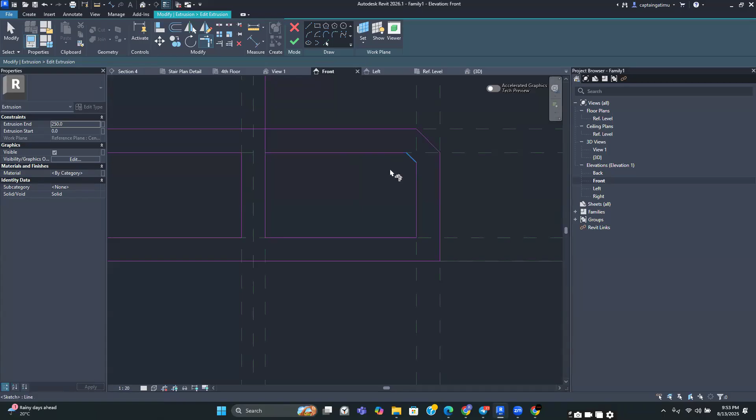After you have that, you'll notice now you need to draw other lines here. So just draw them, just 2 short lines, then use trim extend to corner to ensure this line is now continuous, and it's a continuous loop. Let me do that. After you have this detail, just click on finish, and then you can go to the 3D view, and you can see we have our pot.

So that's how you create the family itself. Then now the other aspect we need to change is the depth. You can see this is the front face, so the distance from this front face to the rear face is 190mm. So we need to enter that.

So we'll go to Revit. We are going to go to the front face that we were in. Select our pot - you can do it in the 3D view as well. Select your pot, and then after you select your pot, go to the constraints in the properties and change this extrusion end to 190. Ensure the extrusion start is 0 and the extrusion end is 190. Then click on apply and OK. So we have such a pot. Okay, so this is the first step of creating this family.

Okay, so I'm going to save it. So let me save it. I'm going to save it somewhere, file. Let me go to save. Where can I save it? Let me save it to my desktop for now. So I could call it pot one. I could enter the dimensions. So this is

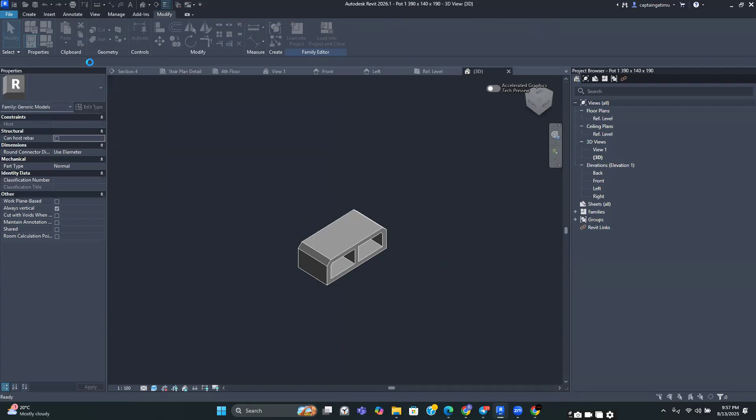In the templates, go back to English, Family Templates. Ensure you select English, then go to Metric Generic Line Based, and click on Open.

After you click on this, now we can create the nested family that I'm talking about. To do that, we need to first bring that family we created, since our nested family has two or more basic families.

After I open it, I'm going to go to Create, then Components, and that's where my pot is. It has been oriented in this manner. Press space and click at that junction, then press escape.

After you do this, this is the next step. You're going to select these pots, and then we are going to use the array tool here. Select this pot and then click on the array tool.

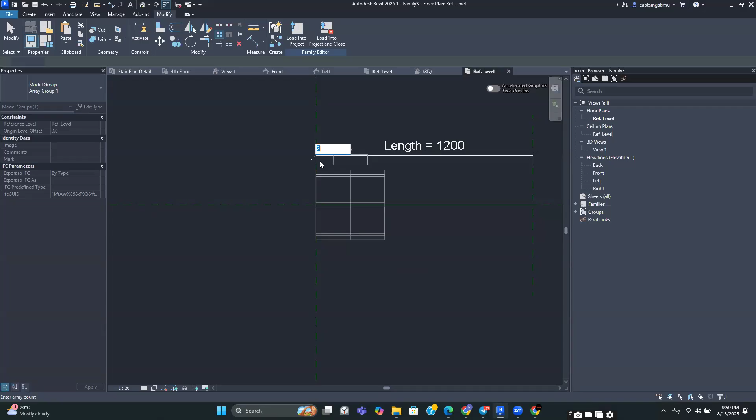Instead of modeling one by one, all you need to do is go to Revit, draw a straight line, and the pots are going to be modeled. After you've done that, just click outside and you have that. So after we have this, we can do something extra.

Revit allows us to make our families a bit dynamic, and what makes them dynamic are the properties we usually change in the type properties. We can always create new ones, and I want us to create a new one that is going to assist us in the scheduling bit of this course.

So to create a new parameter, let me show you. These are the properties that you usually see when we go to the type properties. We can always add a new one, and here we're only going to add one, to keep it simple.

We are going to select these pots that we used the array tool to create, then zoom in and select this dimension that looks like a 2. Left click on it, then go to the labeling panel and click on Create Parameter.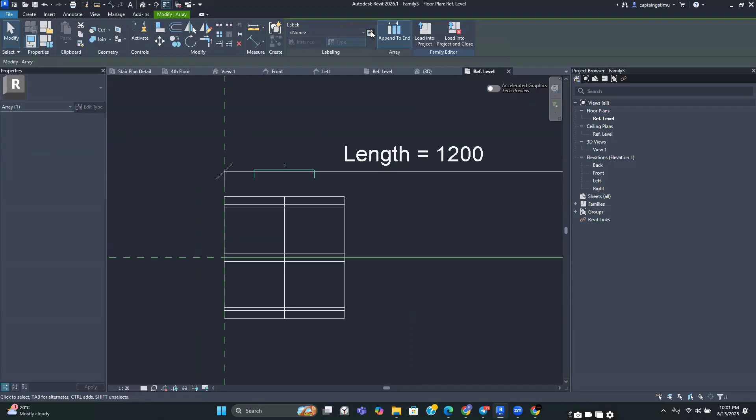This creates a parameter that changes in the Revit model, and it changes automatically. Click on this parameter and name it. Let's call this number of pods or blocks, whatever you prefer.

In the type here, change it to Instance. You just click on the name, enter 'number of blocks', then here enter Instance, and click OK.

After you've done that, go to the properties. See here, in the properties, you pick this option in the bottom right, Family Types, and left click on it. Now we have a new instance created here.

So we can also limit the length. We are going to left click twice here, highlight 'number of blocks', and use Control C to copy that name - you left click twice or even once, then highlight the name you created.

In the length field, you just enter Control V, and then multiply it by this length here. This length, for avoidance of doubt, is this 190 mm. Let me go back to the software so that we can finish this.

So I type 190, click on apply, okay. And then you can see it's now going to update automatically. After you've done that, just save it: click on file, save. You'll be prompted to save it somewhere, so I'll select this location and add a new name here, like 'number of pods' or 'number of blocks,' whichever suits you, and then click on save.

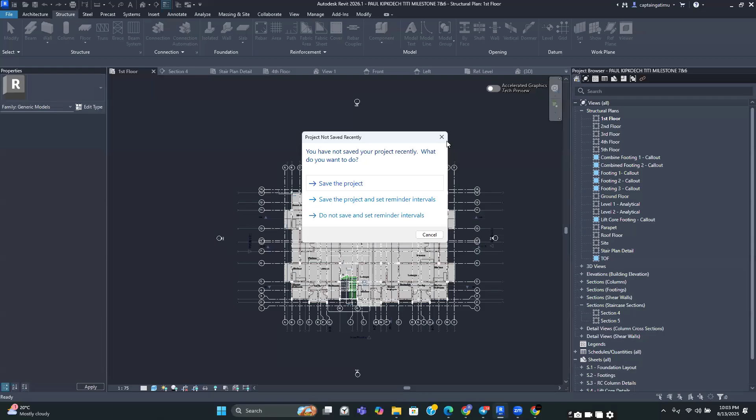I will not save my work, I'll click escape, and go to the floor plan I was working in. I was on the 4th floor. Once I'm here, I'll go to Architecture, then Components, Place a Component, and I have my family here.

In the placements, use placement on plane because we are in a plan view. So placement on plane, then you can select where to place it. I'll start with this point here and model it. And now you can see the importance of creating the nested family—I can extend it up to there and have such a detail.

After I've created one, for example for these ones that are similar, I can now easily copy them. Let me check the constraint so that I can move it straight. I can easily copy this to the other pods over there.

Okay, so we have that, and that's how you do it—it's that easy. For this section here, I forgot to copy one, so I can select it entirely and copy it from this point here to this point there. Then you're good to go.

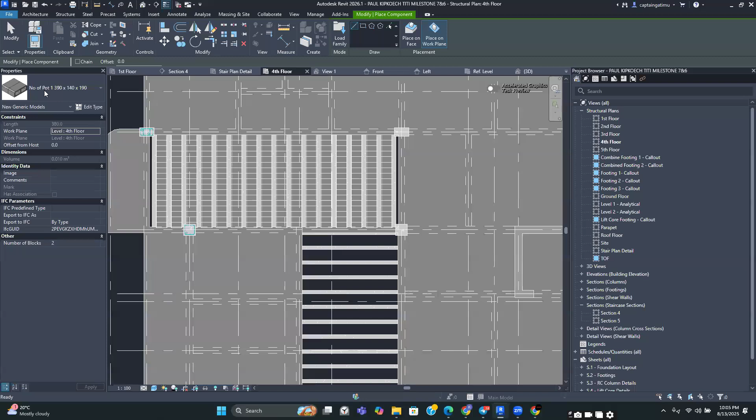For this point here, I'll go to Architecture again, Components, select the pods, and model them going in this direction. Just ensure it's straight and click there. Sorry, I don't think that was very straight—let me go to Components, place a component, and model it in this manner here.

And click there. At times there will be gaps, and the reason is that these pods are usually of a fixed length. If they cannot fit in this distance, you'll have a gap here. Don't worry about this—these gaps usually happen on site as well, and they're usually filled with concrete during casting.

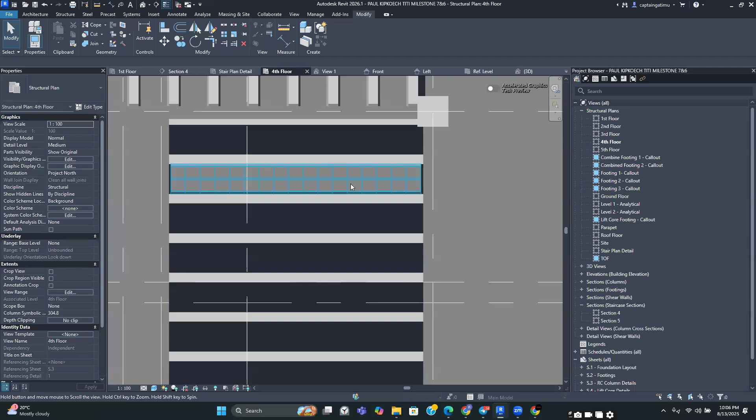So what you can do is move this from this point so that you have something similar on both ends. You can do that and copy them to such a section there. After you're satisfied with that, you can now copy them.

Let me use this point here and copy them to this view here, this view here, this view here, this view here, this view here, this view here, and this view. Let me use this option here to be accurate.

This is the beauty of doing this—if you have such a detail, you can just create a section at this point and get to see how this interacts with your details. So you can be able to create that.

There's something missing. So what I want you to do after you've created some of them: right click, select one, right click, select all instances visible in view. Remember, it needs to be below this slab here—there's going to be a slab above the pods. So you can select all of them.

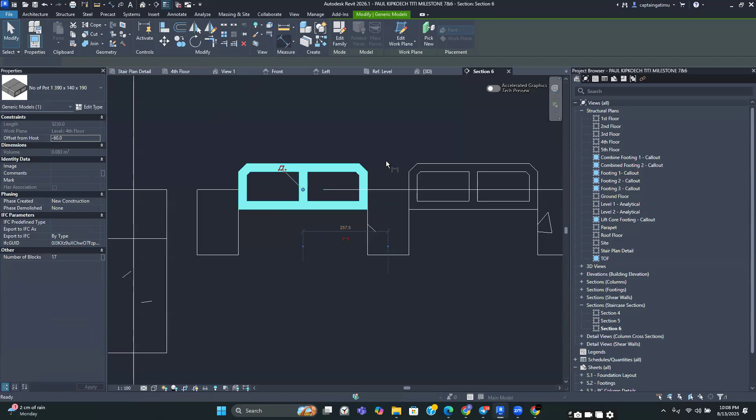In the constraint, offset from host, enter an offset—let's use a slab of 60mm, so enter -60, press enter, then click apply. It'll take a moment, then press escape. At this point, if you go to this section, you can see they have moved. Let me see how this looks. I can just measure this—this is 80.

So I delete the dimensions. I'll select them again, right click, select all instances visible in view. Then I'll add the -80 to the -60, so I'll have -140, and press enter. Then apply, and they should move to such a point there.

I still think they should move lower, so I'll select them, right click again, select all instances visible in view. Then I'll add another -60, then click on apply, and we should be good to go.

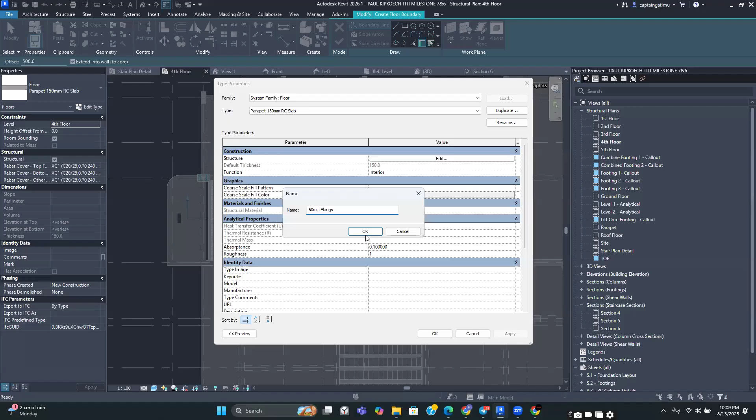With this, once we model the slab here, it will look a bit perfect. So we are going to go to our fourth floor, and for this section here, go to structure, create a floor, create a new one. We'll edit type, duplicate it, call it 60 millimeter flange, click OK, go to edit type, change the thickness to 60mm, then press OK, apply and OK.

After you do this, select these. Which one are we making edits to? I hope it's this one. Then you can just draw this there and click on finish. Then if you go to your view, you can now see you have a detail that makes more sense.

So that's how you generally create these families, and you can have them in your detail there, right? I will share, I'll record a short video tomorrow so that you can be able to do this at a slower pace.

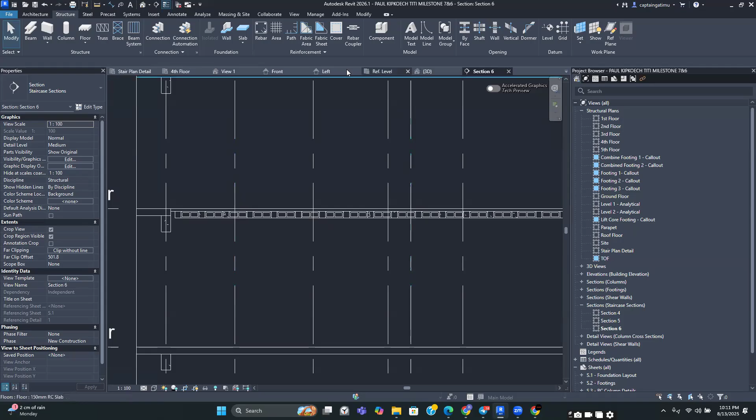Let's say the spacing of your slab is not equidistant, or it's not equally divided per each slab. You will find in some instances at the ends maybe half of the slab, or half of the hollow pod can only fit there. Is there a way of making it dynamic such that if the spacing allows for half of the pod to fit, can that be modeled when you're modeling? Can it be dynamic such that it can just pick half of the pod, or do you need to make another family for that?

The other... you need to make another family for that.

Okay, the other question, I think it's on the same hollow pod. Where do you change the material properties, like the Newton per meter? Let's say you have the manufacturer's data sheet and it gives you the material properties, like the Newton per meter, so that when you're doing your loading, especially for the dead loads, you have all that information given, so it's easier to calculate when doing the analysis of the dead loads.

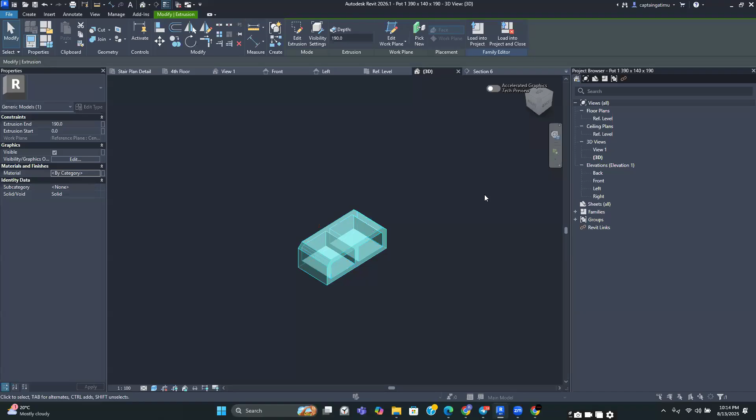Okay, so you can change the properties here if you want to view them. You can select, let me go to the 3D. You can select it here, go to material, select a material you want, but you cannot assign it structural properties. You cannot come here and say the stress that this material can handle is probably 6 newtons per millimeter squared, or the compressive strength of this material is such a value. You cannot do that.

And I'd also like to think, I don't know, in my view, I don't think it's necessary, because as you design them, you are told that we usually assume they play no role in the structural integrity of the slab. They are just there to reduce the volume of concrete.

Okay, my last question, I think it's on the same. Why have I forgotten it again? I think I've forgotten the question. Let me try and remember it in a minute.

Go to that drawing. There was a question that I wanted to ask there. I don't know if I can see it. Which drawing, the book? The PD, the Revit model. Okay. Is it... can't seem to see it.

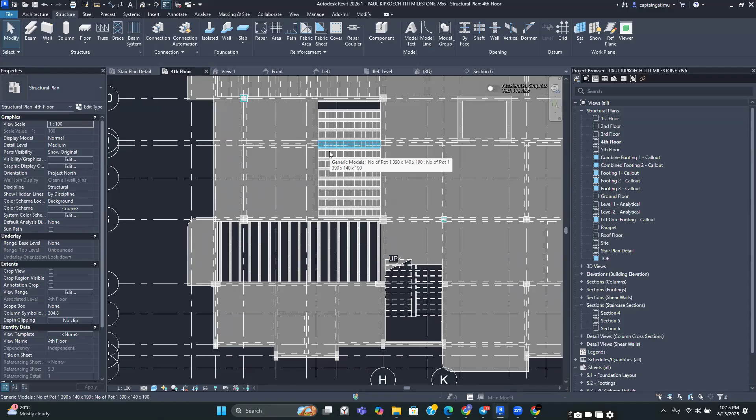Oh, the one I wanted to ask on the columns. Let's say you have done reinforcement for one or two columns that are similar. How do you propagate that reinforcement to the rest? Say the 500 by 200, and you want to replicate it to the rest of the columns, the members. Is it similar to how you are doing the footing?

With regards to propagating, I think it's something that requires a lot of care. So if you have the 200 by 500 column, the one we modeled rebar for, and you want to model the rebars for the other ones or propagate them, you can go to visibility graphics. I hope you can remember the filters we created, go to filters and uncheck everything else, and remain with the column ones only. Click on apply. We still have some elements that we modeled after we created the filters, so at this point you'd have to do this really, really carefully.

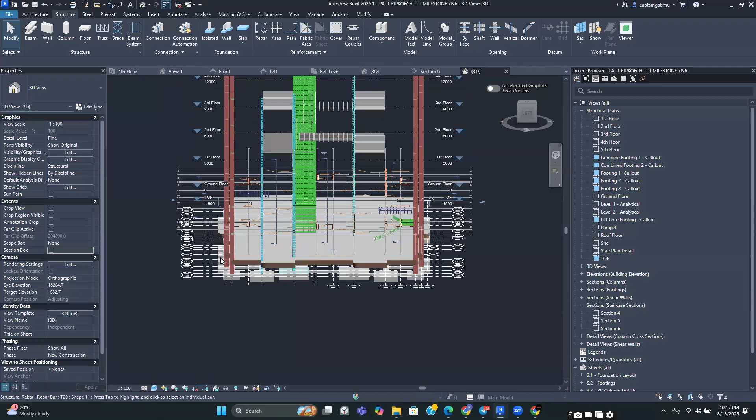Let me do this as shaded. Let me start with this column here. I can select this column, zoom in, select multiple columns — but it won't allow you to do that. So select one column at one level, click on propagate rebar, and you align by face, then select the source face. This is your source face, and then you go propagating that to all the other rebars, or to all the other columns.

But sometimes it does not work quite well. So sometimes you just select one bar — sorry, let me right click — select all instances, say select all instances in hosts. Do I have that? Okay, I do not have that. So you can see sometimes it does not work very perfectly.

For example, if I select this column here and try to propagate the rebar by face, you're going to notice that it does not propagate the longitudinal bars, especially if they have not been hosted correctly. So you can find that it's an issue with hosting. If you select this one, pick hosts, pick this column as the host, then press escape, select this column, go to propagate rebar, propagate by face, select this face and then that face, you're going to find that they are propagated. So it can be done, it can be easier, but it needs a bit of ingenuity as you do this.

Okay, and then you have to be very careful. You can see like that one I've already messed up — I've selected the wrong face, but you can always left click on it to uncheck it and then proceed to do the same. So you'd have to do this level by level, for example if you are doing the bottom ones. But I think it's too tedious.

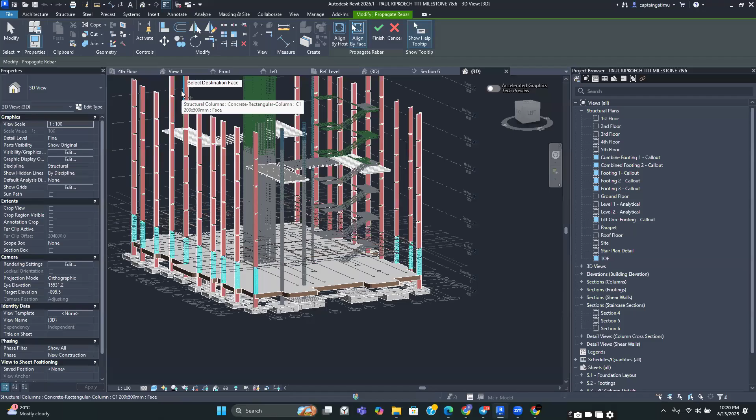If your interest is in scheduling, you can just have the schedule for one column. Then from this view, you can tell for the column ones, I have this number of columns, and multiply that amount of rebar by that number. I think that's much easier. Or you can manipulate the schedule — you can always add a calculated parameter.